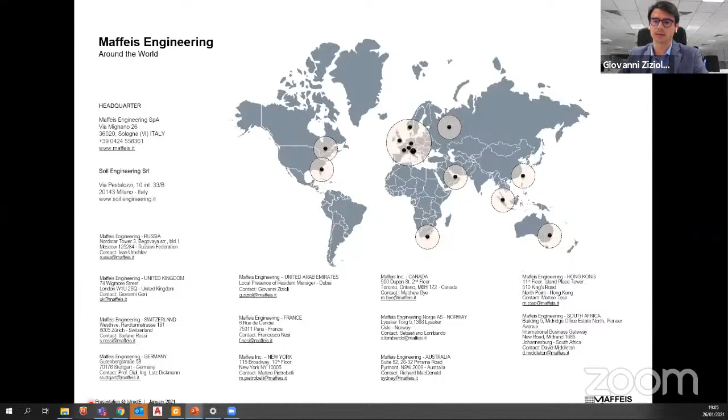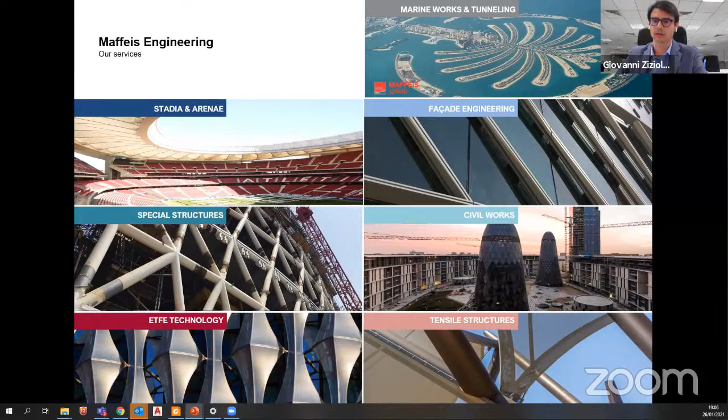Some photos of our office, just to give an idea of what we do. We don't do only specialty structures; we also work in other types of engineering services related mostly to structural and facade work. Of course, today's topic is closely linked to what we call specialty structures, especially with steel elements.

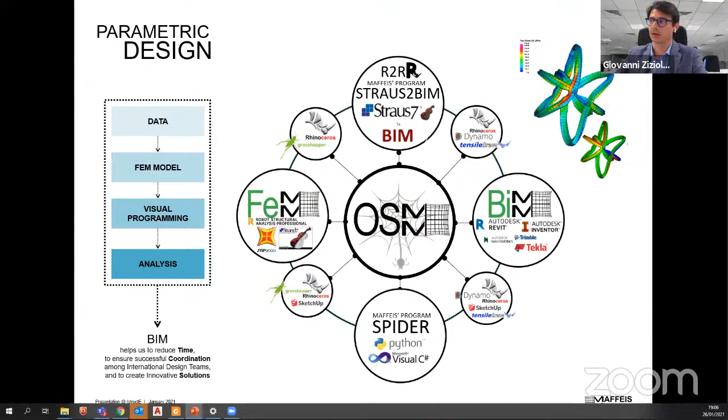I've prepared something in my presentation related to what we refer to as the one single model, our integrated approach for parametric design. I'll show you later a brief video of how this one single model approach has been applied on this specific project.

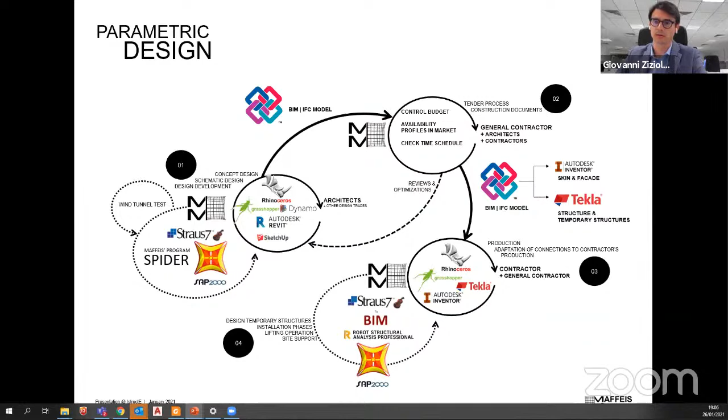I'd like to give you some ideas about the project itself, and especially thank all the players involved. Our client had the most complicated part of the job: the fabrication and erection of the horizontal tower, as it was defined, of the link bridge itself. That was Eversendai Engineering. The main contractor, Alec, is executing a fantastic job. The consultant was WSP, together with Nikken Sekkei as the main consultant and architect.

And the final client was represented by Ithra Dubai and ICD, with Mace as project manager. I would also like to thank our team in Italy, led by Enrico Mazzarolo, especially Marco, Riccardo, Jacopo, and Claudio, who have worked extensively on this project for a long time.

The project for us was substantially completed last summer, after almost 2 years of design. Going to more technical aspects, the link bridge stands between the two main towers, which you can see in the photos and renders, at about 300 meters and 241 meters height. The bridge hangs at a height of more or less 125 meters from ground level and is 210 meters long.

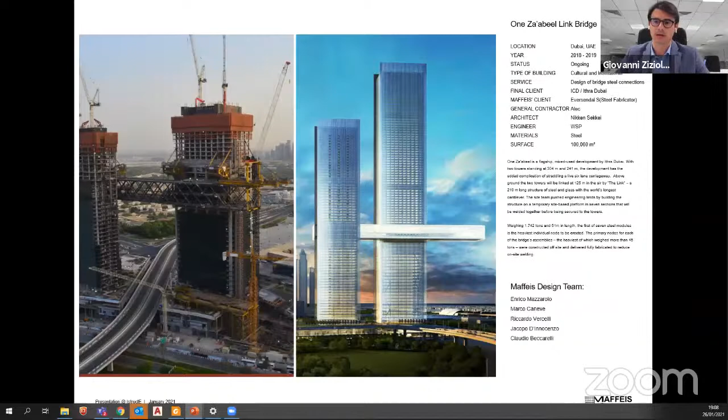For us, the joints were substantially identified in 3 typologies: typical interface nodes, and the 2 joints in Tower A and Tower B, connected to the civil works in the main tower. We had about 1,000 secondary node connections analyzed analytically, about 520 main and primary joints, and the total number of typical joints analyzed with the FEA approach, which I'll show later, was about 190.

I included some ideas about the assumptions and design criteria followed during the design of these joints. First, the joints were identified in an optic of parametric design, with zones, families, subfamilies, and then a unique number. The zone identified the location of the joint - for example, upper chord, bottom chord, elevations on Tower A or Tower B, internal interface joint, and so on. Families identified joints with the same geometry within the same family, and subfamilies identified joints with the same profiles or dimensions. The unique number identified every joint with one single number not repeated anywhere else.

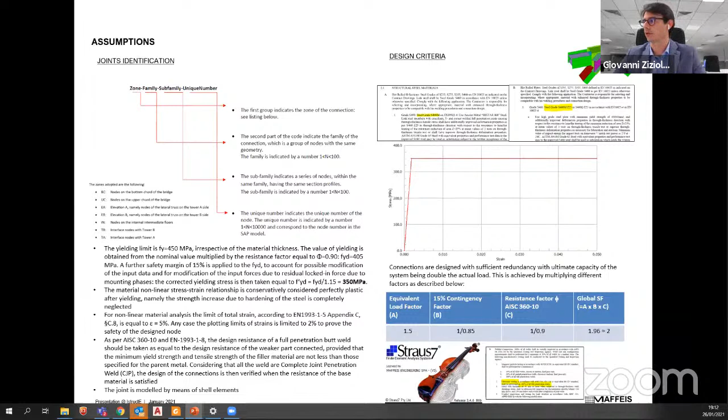For the numerical simulation, to transfer the straining actions for every element converging in a joint, we used what we call transfer beams, moving the 6 components of the straining actions in every member up to the edge of the local model, where rigid links connected the straining actions to the plate.

However, since these transfer beams were not connected at the center of the joint, there was a very small gap in between. The only way to guarantee equilibrium would be that the sum of the total reaction of every component of the 6 components of reactions equals 0.

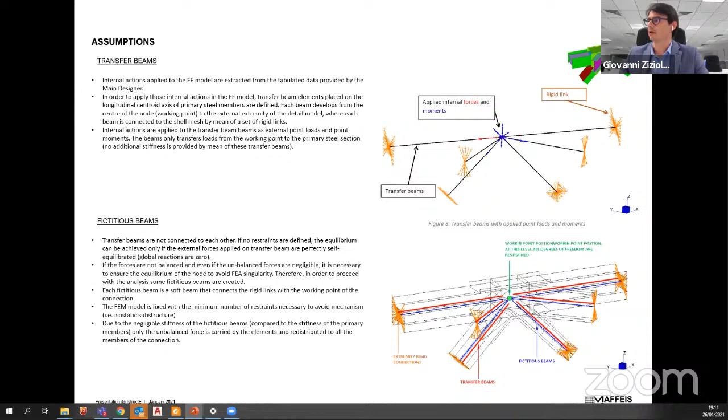Since this was not the case - because the global model was giving unbalanced reactions in the joint for various reasons related to the modeling of the global bridge and tower plus bridges model - we decided to implement a technique used in various projects: including a fictitious beam, which has the same center line as the transfer beam but has very low, substantially null stiffness. This way, the fictitious beam is able to balance the unbalanced reaction and distribute it between the elements based on the relative stiffness of the various converging elements. This procedure proved to work, and I will show you later some results, avoiding numerical errors during the FEA analysis.

Some specific aspects analyzed during this project, not really ordinary in common structural engineering practice, were the consideration for plate eccentricity.

We modeled the plates to take into account the additional moment generated by the eccentricity due to the plates not being aligned in terms of center line, which the software wouldn't do automatically. We also considered the effect of cope holes on the localized stresses in the single plate, using 40mm cope holes on the safe side. The effects of these cope holes proved substantially null, so this verification did not change the design results of the joint.

I'd like to show you one typical interface joint and one typical steel-to-steel intermediate joint. We'll start with the second one. This is a joint on the upper chord, family 1, subfamily 11, with single node number 4680. You can see the geometry of the elements of this specific joint.

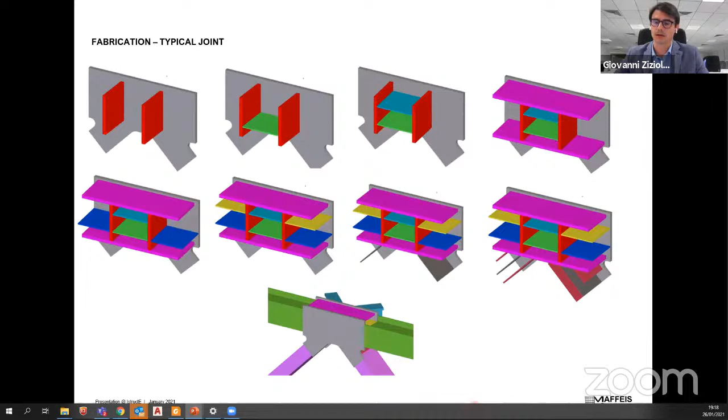This gives an idea of one typical joint and how it could actually be fabricated step by step, up to the final product.

Moving to the interface joints, these are obviously the most critical connections in the whole project, representing the primary interface between the link bridge and the concrete towers. They need to withstand the in-plane bracing forces transferred from the bridge to the concrete towers. On the bridge side, these reactions are 100% taken by the steel sections.

On the tower side, the forces need to be progressively transferred to the RC works, to the concrete slab and the concrete wall. In order to solve this type of joint, we decided to follow an FEA analysis as well, which I will show you later in terms of results.

In a nutshell, we adopted two types of resisting mechanism, and despite the standard allowing us to choose just one of the two, we decided to verify them both—an assumption that goes on the safe side due to the necessity of having a very robust design.

The first mechanism relies on the bending strength of the column, so the bending moment is taken by the embedded column, the vertical element. The second mechanism instead relies on the bending and bearing strength of the horizontal steel beam, again on the bridge side.

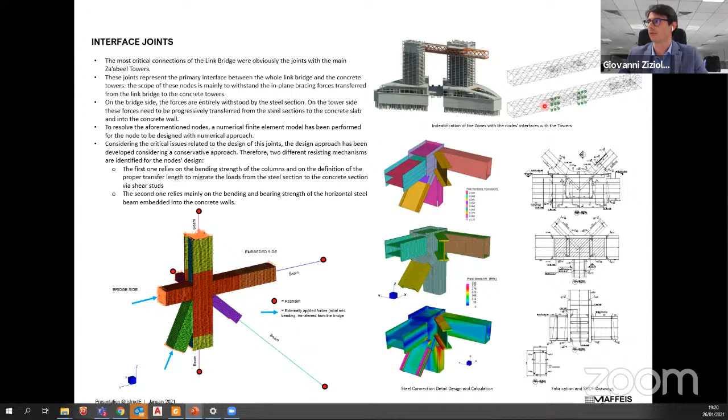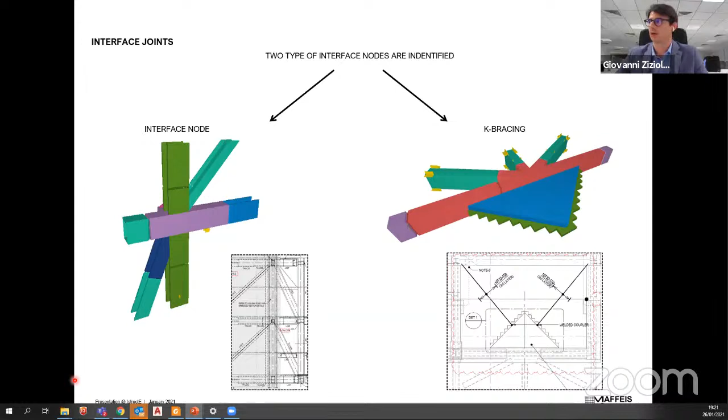The two types of interface nodes identified were the purely interface nodes I showed you earlier, identified by embedded columns, beams, and diagonals, and what were called K-bracing, with an embedded steel plate to redistribute the forces inside the concrete slab due to the in-plane bracing from the bridge.

So graphically speaking, transfer mechanism 1 that I explained earlier is substantially the governing mechanism for the columns.

So at the contraflexure point, the full bending moment is given to the column itself, while the vertical and horizontal forces are distributed between the beam and the columns. And the contraflexure point was identified at mid-height of the column itself.

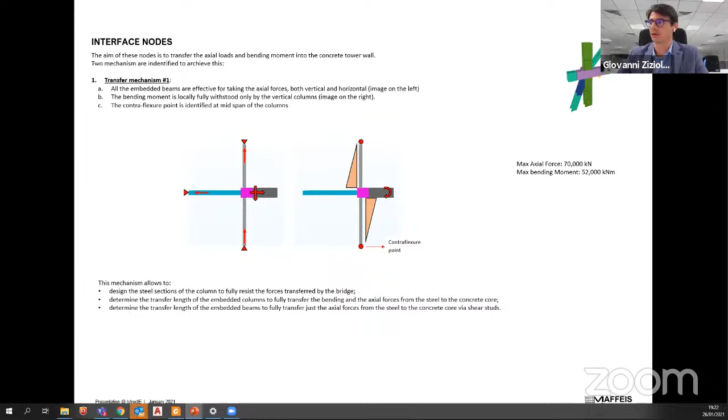Just to give you an idea of the amount of reactions that had to be transferred through these elements, we had about 70,000 kilonewton axial forces and more than 50,000 kilonewton meter bending moment. So very, very high reactions to be transferred inside the tower.

Mechanism 2, instead, as I mentioned earlier, relies on the distribution of the bending moment inside the embedded beams via a contribution of the bearing resistance on the concrete side. So in this case, this mechanism is usually governing the design of the embedded beam.

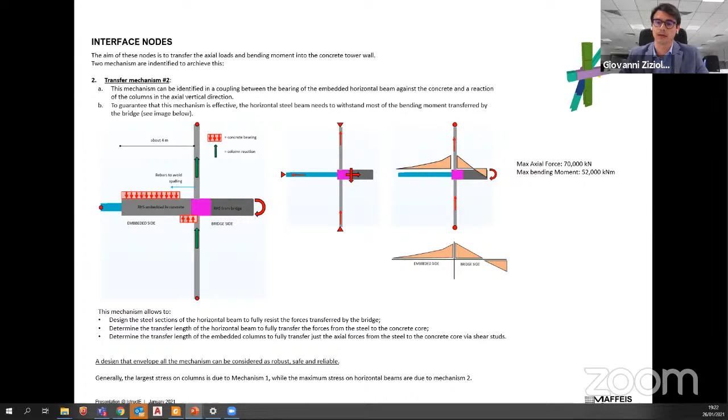In terms of the K-bracing, instead, we took a similar approach in terms of resisting mechanism. So mechanism 1 and mechanism 2 again were enveloped in order to define a very robust design that will be able to withstand both conditions.

So the two mechanisms substantially distribute these two components in a different way. In mechanism 1, both the Fx shear force and the bending moment Mx are split with certain percentages between the concrete slab and the concrete wall.

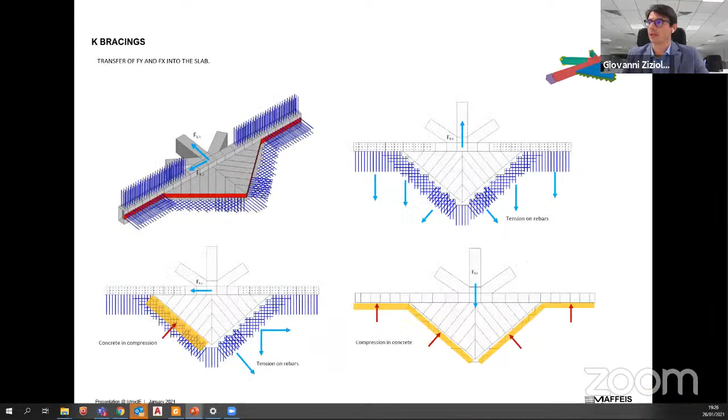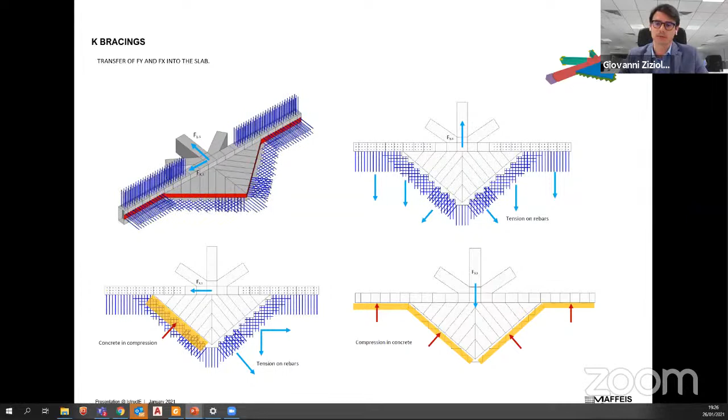So this is basically how the transfer mechanisms were then verified. Of course we took into account the existing bars, and the Fx and Fy components are taken substantially by a strut and tie mechanism, with compression on the concrete side and tension on the rebar side.

Similarly, we did this for the two moments Mx and My that are transferred inside the slab, again with compression on the concrete side and tension in the rebars. And we did the similar distribution for the wall.

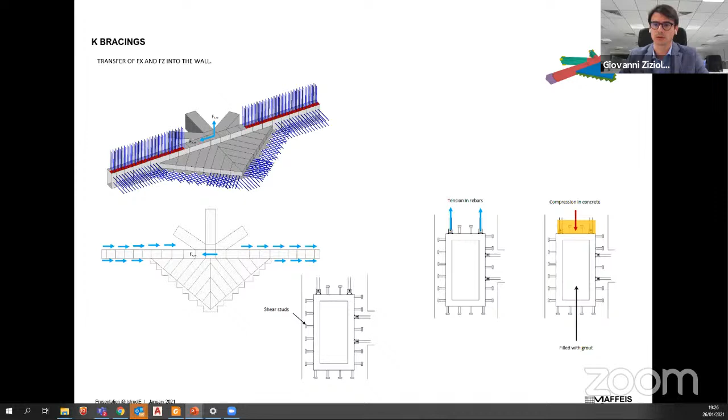The extensive shear studs that were present were then defined, and the rebars were designed based on the straining actions distribution and the percentage of the resisting mechanism that I showed you earlier, so Fx and Fz for the wall.

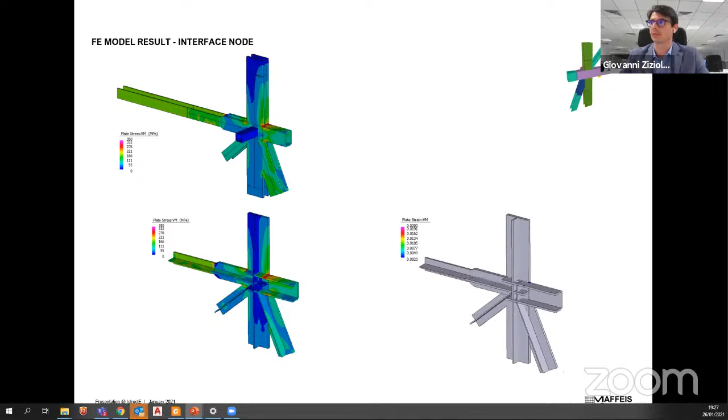So the results in terms of this were more, let's say, an analytical approach. The joint was, of course, also designed using FEA analysis to verify the stresses in the plates and in the converging elements. These are the results of one typical interface joint in terms of stresses and strain.

Similarly, we did this for the K-bracing. These are the results of the stresses in all the converging elements, in the wedge plates, and in the stiffening plate inside the box beam.

I have a quick video that I would like to show you in terms of how the parametric approach was used for this specific project, showing how the process of designing and verifying these joints, which come in very large numbers, was made as automatic as possible.

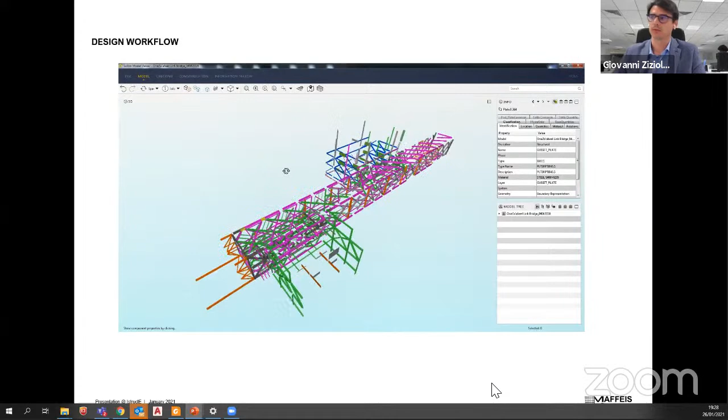We started with the definition of the IFC geometry that was imported into an IFC file, where all the elements, all the plates of the joints and the converging elements in the joint itself are identified in terms of their dimensions and materials, and in this case it's all S460.

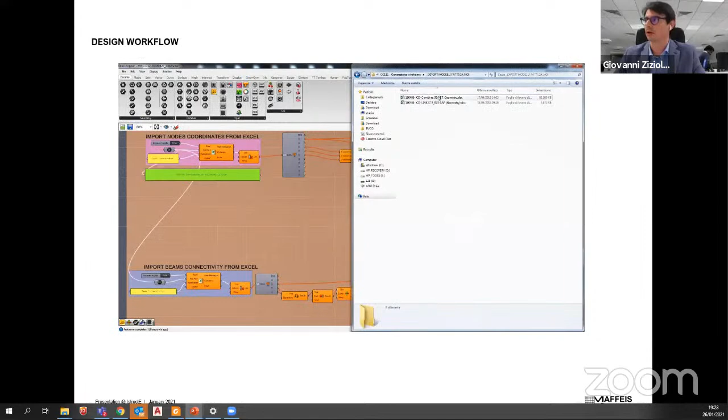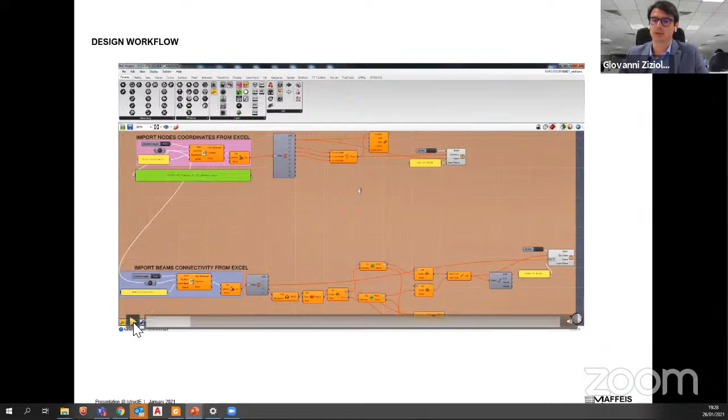Then we imported the global model. We had two models, basically from WSP for the main bridge: an ETABS model and a SAP model. These models were then imported in terms of all their information, so geometry and straining actions, inside the Grasshopper platform.

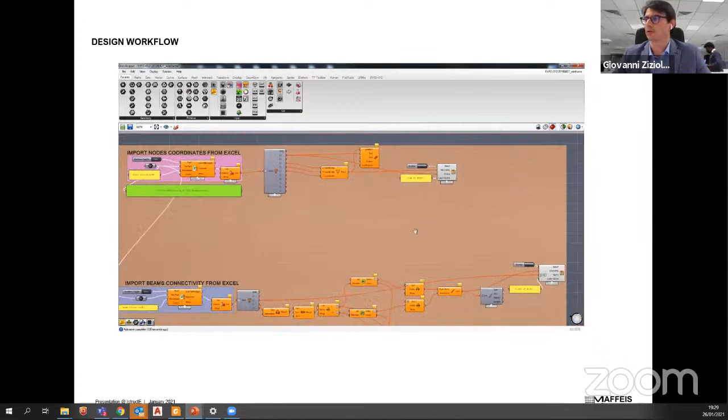Basically the nodes were imported in terms of coordinates from the Excel file, and then we imported the connectivity of all the beams.

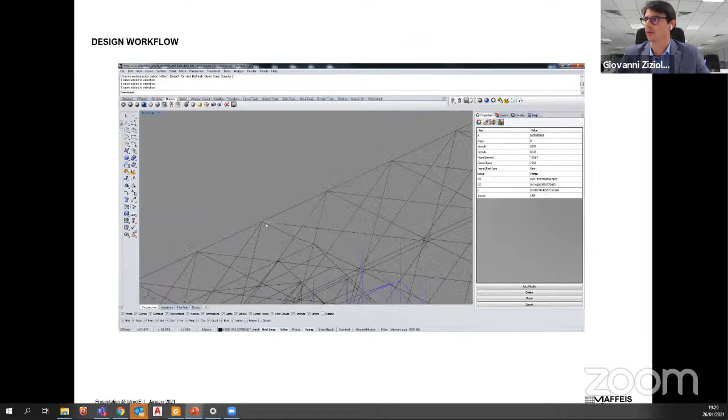Once we reached that, we could switch on in Rhino to visualize all the elements. All the elements here are already defined in terms of all their properties, and of course with the unique number that corresponds to the SAP and the ETABS model.

And then we did the same for the joints, which will come shortly.

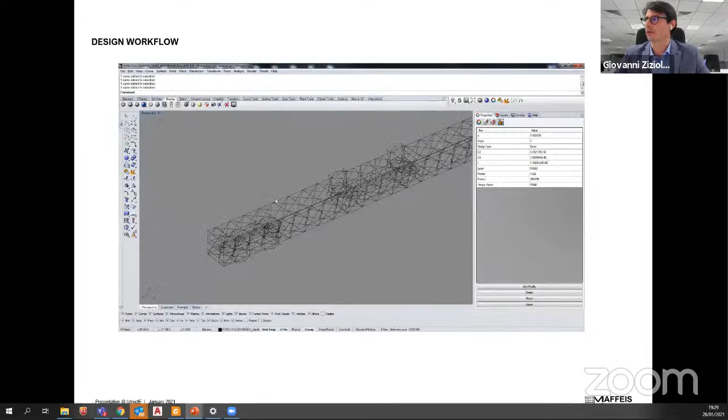So for the joint geometry, we did the same to import it inside the wireframe. If we switch on the related layer in Rhino, we're able to visualize graphically each one of these joints. All the plates are correctly modeled already, and they are imported directly from Grasshopper.

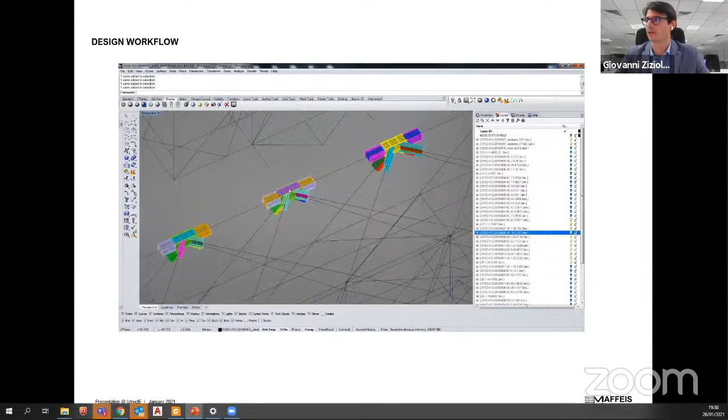If we select a single plate, all the properties of these plates are already assigned - substantially, in this case, the thickness, so the dimension of the plate and the thickness itself.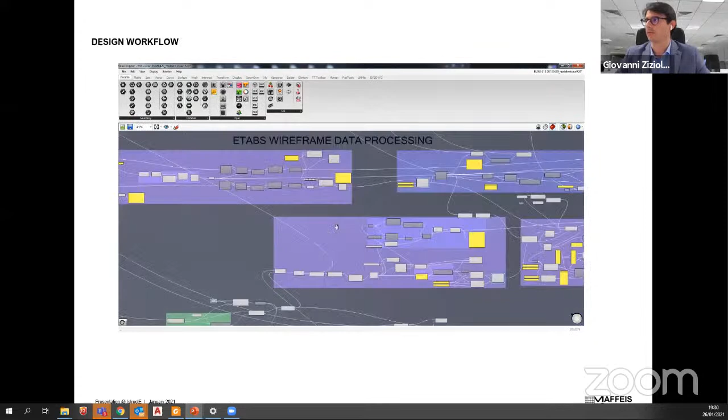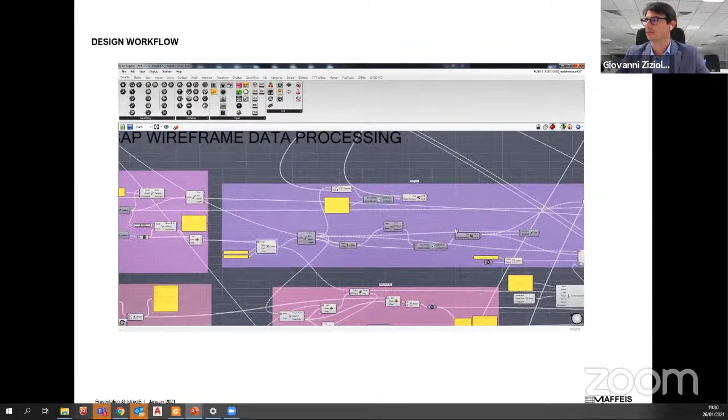The next step is the generation of the FEM node by means of Grasshopper. So we input the wireframe, we input the ETABS, we process the ETABS wireframe, and we do the same with all the beam properties. We do the same for the SAP global model, as well as the beam properties from SAP.

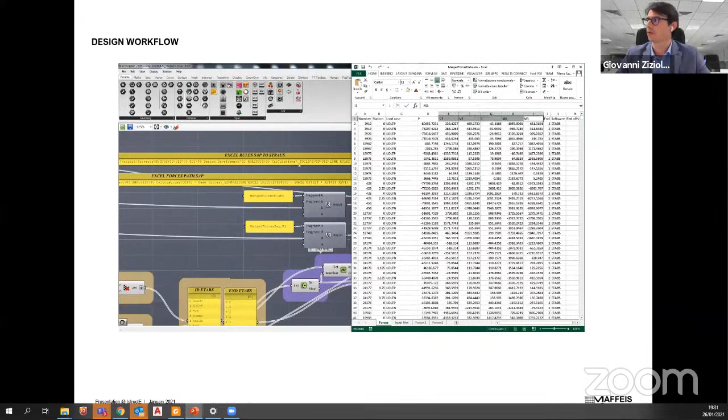And then finally, we're able to import and process all the forces, all the straining actions for every element. This is the input that we had: the six components of the straining actions for every converging element in every joint, for every combination.

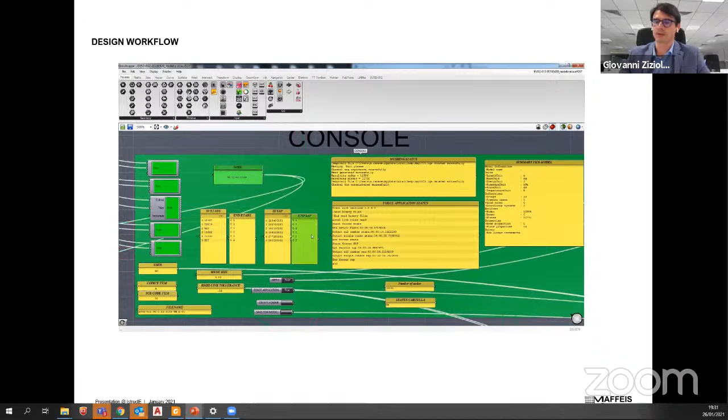Then we select which type of joint we want to analyze, with the single joint number, family, subfamily that I described earlier. And then from the console, we're able to create and mesh the surface, which you can see here on the left side.

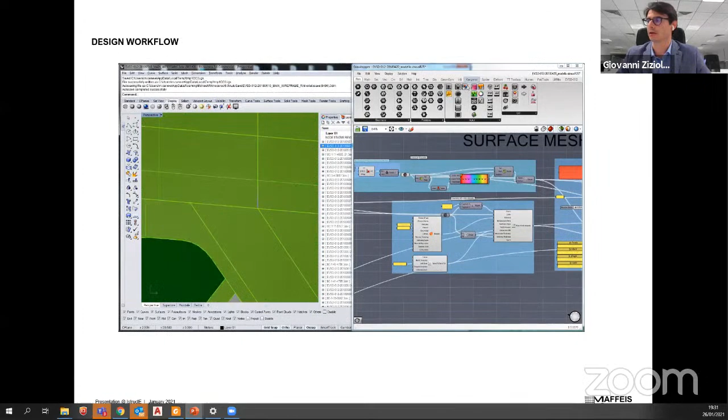The surface is automatically meshed already in Grasshopper Rhino, and it's ready to be exported. We can then save the FEA model, which creates a TXT file inside an automatically generated folder with the unique number of the specific joint selected. This is all created automatically.

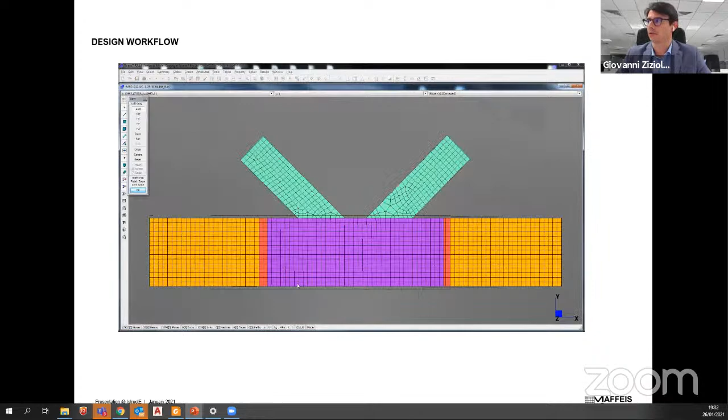Then we can import the TXT into our solver, which is Strand7, and we can cross-check that all the elements, all the plates, are imported correctly in terms of their geometry and thickness. The geometry is substantially correct, and we can check the plates also in terms of their thickness, to confirm it matches with the IFC.

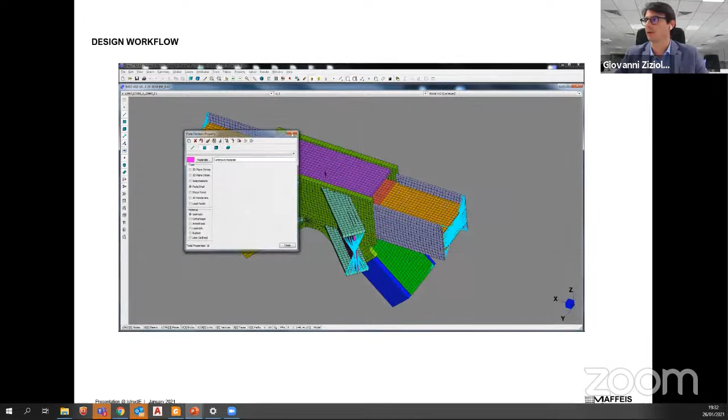And then we have a cross-check on the transfer and the fictitious beams that I explained earlier, which allow us to transfer the straining actions for the transfer beam and avoid numerical errors for unbalanced reactions. Finally, we check all the straining actions for every combination, for both the ETABS and SAP models, that are automatically imported inside Strand7 via Grasshopper.

So the model is ready to be run, and the nonlinear analysis is started, and then the results of this nonlinear analysis are what I've shown you before in terms of stresses and strain distribution.

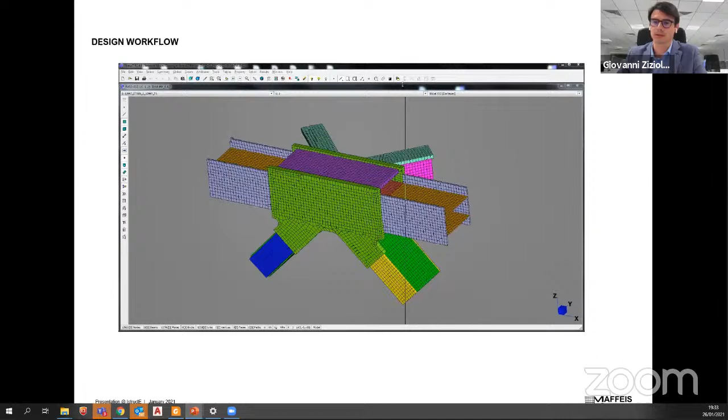Another interesting topic in terms of automatization for us was the necessity of updating this simulation with what was called the validation approach. Just before the lifting of the bridge, there was a necessity to recheck joints due to some modifications in the global design. So the way this procedure was done, again in the same platform in Grasshopper, we added a tool also to

automatize the process of the reporting generation. So basically, in this way, we were able to update all the reports that were generated previously, of course in a manual way, automatically. This would have taken much longer if done in a standard way,

and allowed us to avoid any type of delays on the site activities. So what we did, substantially in Grasshopper, we created a folder path where all the FEM nodes needed to be analyzed. We created a log file path, and defined where to save the analyzed FEM nodes, and we decided how many nodes to run simultaneously.

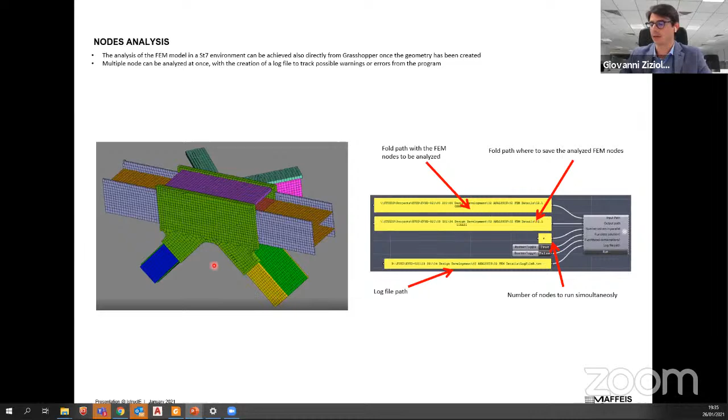Then in the next step, once the joints were analyzed, we were able to list the nodes that we wanted to report simultaneously. For example, in this case, there's a list of 13 joints, and we had the path defined for the saving and updating of the report.

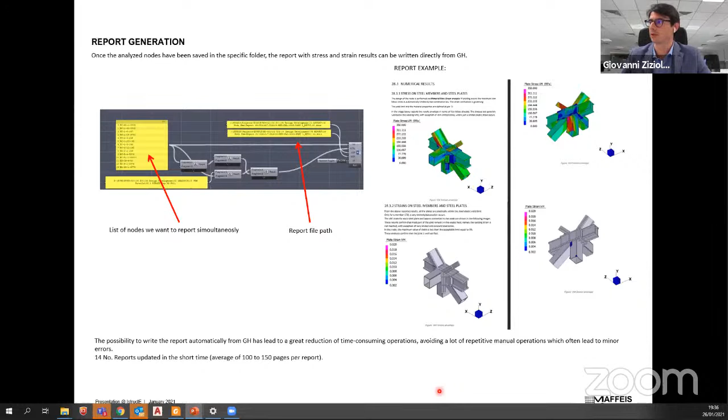So the outcome of this activity was the update of the report that you see here on the right, where all the pictures that needed to be replaced with the new results of the new simulation were automatically updated. We had a total, just for the main FEA joints between interface and typical joints, of 14 reports, and each one of these reports had an average of 100 to 150 pages. So we were able to update all these reports in the quickest and most automatic way.

And then the results of the stresses and strain that you see in the top and bottom parts were automatically updated.

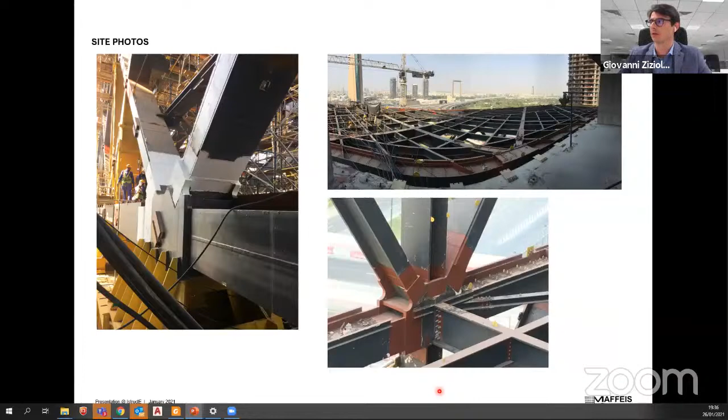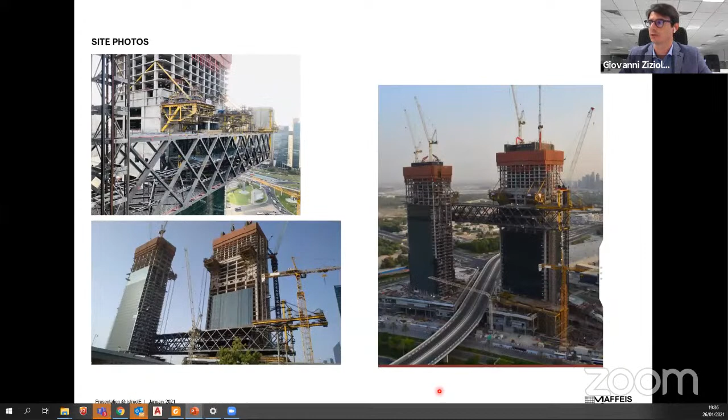These are some photos from the site just to show you the dimension of some of these main joints, and some of the stages of installation. These are some of the embedded elements with the shear studs, and then the bridge, as you probably have seen, was lifted substantially in one piece, with the exception of the last 900 tons of the most cantilevered part, which was lifted into position in one stage.

I've completed from my side, Sama. Oh, that's good. So the connections are big. The topic is good, you know. Yeah, nice. They are very big. Yes.

We have some questions, we'll take up some now. The first question is from Mr. Khaldun Almafsha: Have you considered earthquake movement in connection design, if based on static or RSA approach? Pardon, could you repeat the question? Did you consider earthquake movement in connection design? Sorry Sam, I didn't hear which moment. Earthquake moment, yes, of course.

All the load combinations that I showed you, these massive Excel files coming from the main design, the main design were an SAP and an ETABS model developed by WSP, and WSP of course considered all the load cases, including earthquake. So the straining actions that were imported used all the combinations, including earthquake, wind, and all the cases.

There's a question from Mr. Sabi Kisaf: How did you design for differential settlement between the two towers? This is something that... Sorry, could you repeat the question a little bigger again. Also, the temperature - because as you know the length of the bridge you mentioned is bigger - how did you consider temperature in the design of the connection?

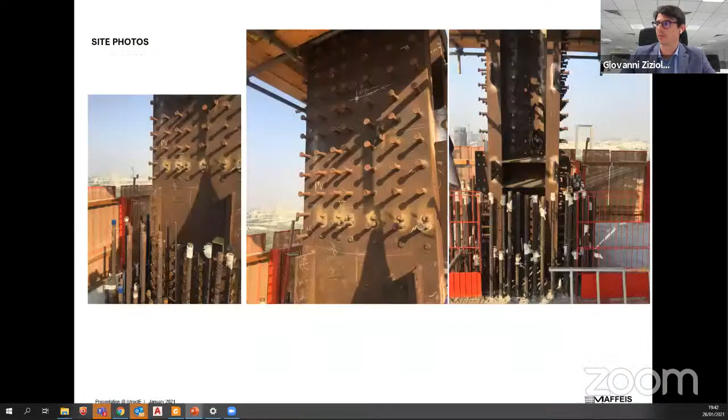Well, it's indeed very dense, as you've seen in some of the pictures. However, there was a necessity for having this type of embeds, so of course one solution was using high diameter rebars. The rebars are grade 400, a standard B400 grade, but substantially there were no specific requirements other than that on the concrete side. These are extremely dense elements, so we tried to use the existing bars as much as possible, but as you could see from the models and pictures, we had high density reinforcement embedded, especially in the slab and column, because of the very high shear force and bending moment that had to be transferred to the bridge itself.

A question from Mr. Richard Tharun: how are the deflections of the link structure considered in the design? The deflection of the link structure has been considered in the design.

It's the same question again, I believe, everybody is talking about overall deflection and differential settlement. The only thing I could show on that topic is that we considered, as I mentioned before, the effect of geometrical imperfection from the bridge side - plus minus 50 millimeters. Because during installation the final geometry could not be guaranteed 100% from the bridge side, this would transfer additional bending moment from the bridge to the tower. But this is not really related to settlement; it's related to the installation tolerances of the bridge itself.

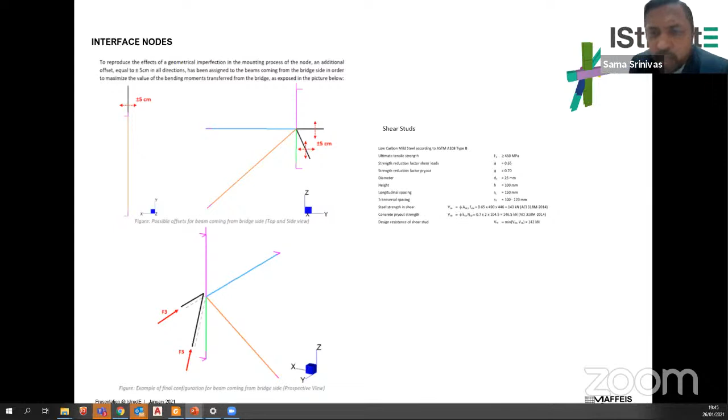It's via shear studs, so the embedded part works naturally, and I could show how it was modeled, substantially via springs. We considered a certain spring value from the concrete C70/85, and this was guaranteed in terms of transmission of forces within the section. For example, for an embedded element, the transfer of axial forces was via shear studs surrounding the section of the element.

In this case, it's either a box section or a built-up open section, an I-section. In the same way, we transferred the bending moment in either the weak or strong direction, where there is a composition of compression and tension, and the relevant shear stresses in the studs are designed to take these reactions.

There's a question from Mr. Payam Ismaili: How was the third-party design check and approval process taken place? Well, there was a third-party approval on the job by the municipality, and they reviewed every single calculation report and model. Even in discussion with the third party, we did a separate model with other software just to give the required level of confidence. So the design was third-party reviewed and stamped, and then approved by Dubai Municipality.

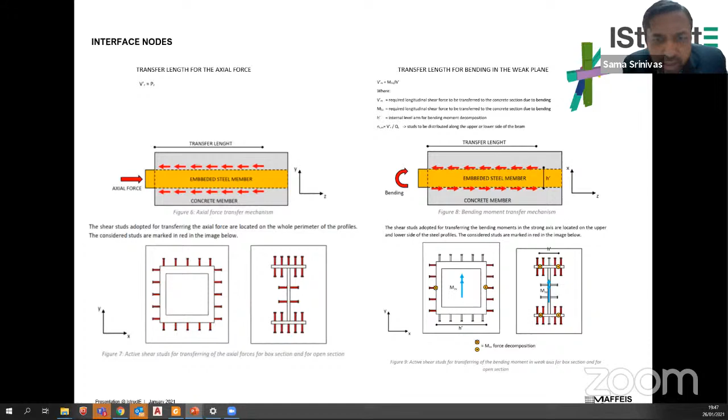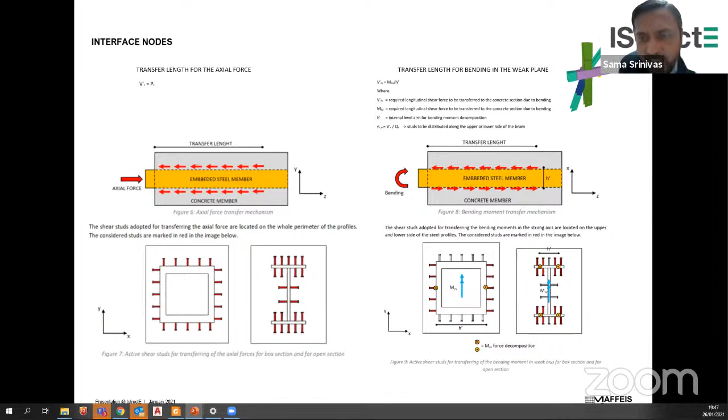Okay, question from Mr. Kalam, who is also a very good technologist in structural engineering. There are many questions from him. What were the first steps you did to define the connection geometry? Well, I started from the numerical results, but substantially these joints were conceptually defined by WSP. So as part of the tender package given to the fabricator, the joints were already identified in terms of their main geometry, and the purpose of the steel fabricator was partially the verification of these joints and partially the modifications whenever required.

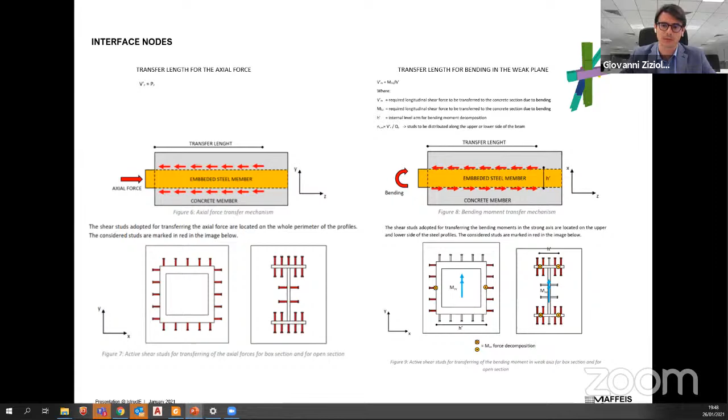For example, with additional plates, increasing the thickness of certain plates. The only elements that had to be completely designed from scratch, or sketched from scratch, were the interface joints, especially the K-bracing. For the K-bracing, with the mechanism I showed you with this wedge plate, it's something we had defined, considering the magnitude of the forces and the geometry of the slab and the wall.

So there was a significant change for this design compared to what was in the tender. But the main typical steel-to-steel joints were, in terms of their general geometry definition, already defined in the tender. And anyways, the plates of the joints are always as thick or thicker than the converging element, and we have complete joint penetration everywhere, as imposed by the specifications.

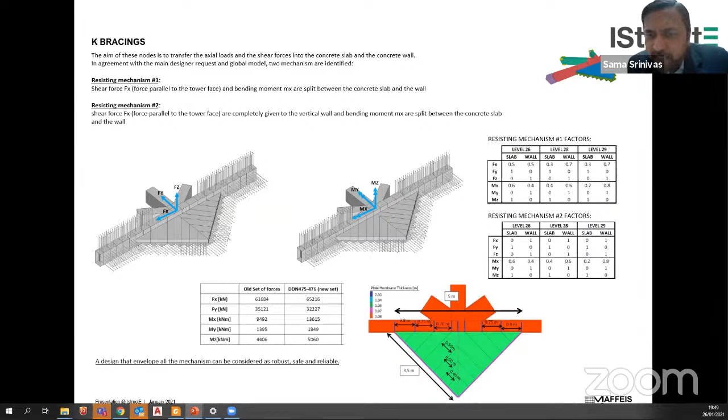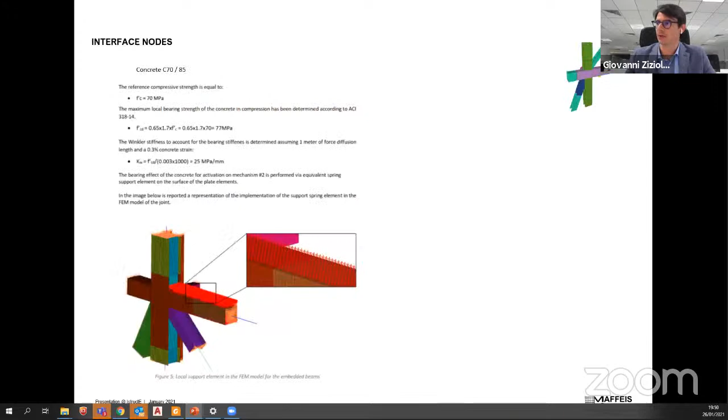Next question: what did you do if you needed to update the geometry based on the Strand7 analysis? If you got any evidence, what do you do? Well, this was done in Grasshopper automatically. So let's say, for example, if we take one of the typical joints, let's take one of them.

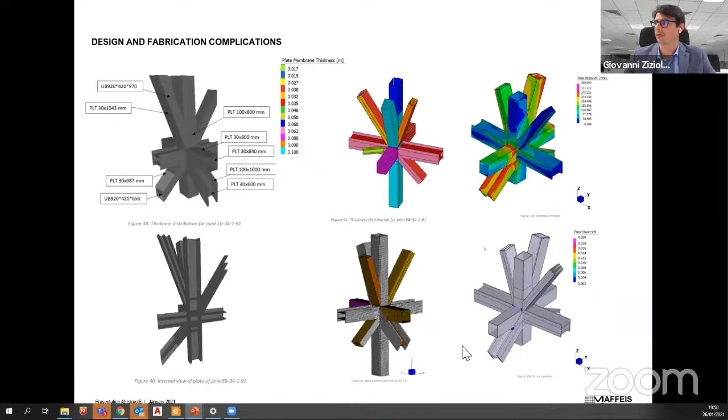For these joints, in case one of the converging plate elements would need to be modified, for example, we could take the original thickness to a higher thickness. The advantage of the automated process is that if all the stiffening plates inside these joints, which are 75mm thickness, need to be increased for certain reasons to 80mm, this could be easily done in the most automatic way inside Grasshopper itself, because the geometry of the node is defined there, and this will automatically update, through the baking process, the TXT file that is then imported into Strand7 for the analysis.

So the operation is not done directly via the solver, it's done fully under the Grasshopper platform.

Again, a question about integrity only. Everybody is asking about differential movement between the two towers, basically how you estimate future settlements. I know it's an integrated bridge — is that part of your scope, or is it part of the main design?

Okay, we'll take a couple of questions. What is the maximum forecast or estimated future settlement once the link bridge is in long term? I guess all these questions unfortunately relate to the settlement or the global design of the towers. I don't think it's something I could possibly answer.

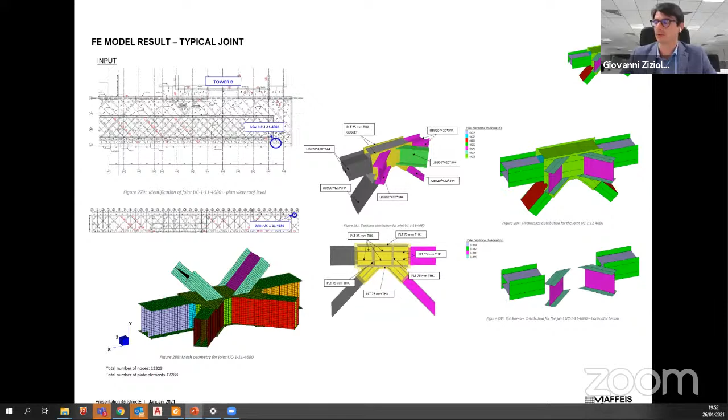Another challenge was, well, I showed you a few examples related to the eccentricity of the plates and the modeling of the couples. This is something we didn't initiate on our side — it was requested of us.

Other challenges were related to the fact that the automated process cannot be fully controlled by others, so it was challenging to show and explain how this was actually done. Fortunately, we had the chance to meet with the municipality and explain it to them.

Definitely the embedded joints were a good decision for the interface joint, designing for this double mechanism that I explained analytically, considering both mechanisms, because this was one of the things that was requested, for example, by the municipality later on.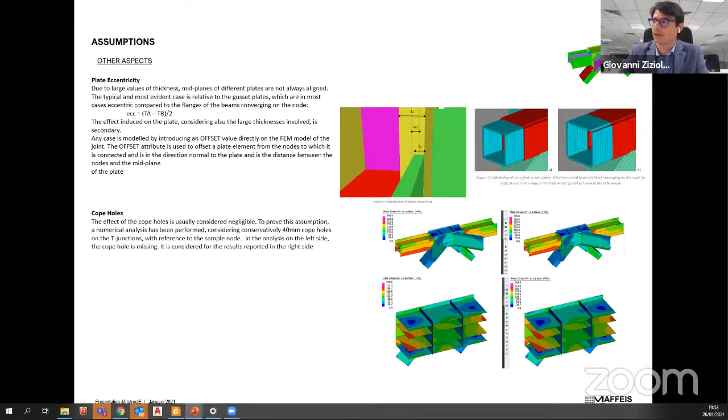Oh, okay. And what is the grade of steel? Any special grade of steel used for the connections, or is it the same?

As I mentioned earlier, the grade was imposed as standard, S460, used for all the hot rolled sections as well as for the plates. Of course, for the secondary commercial profiles, there was grade S355, a standard grade.

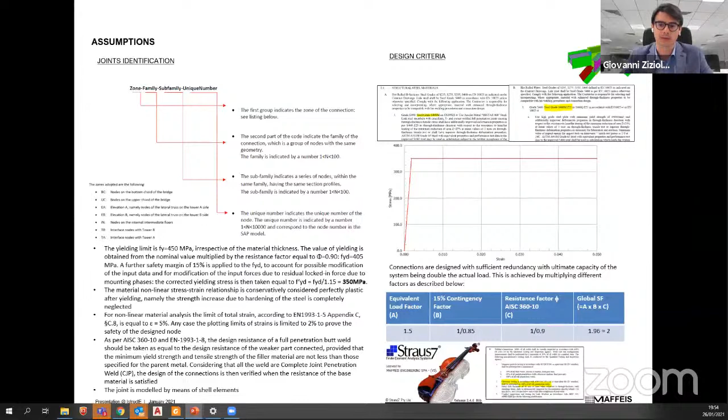The peculiarities of this S460 were two, I would say. One, the high yield strength, with constant yielding no matter the thickness of the plate. This would be very important because with such thick plates, we would otherwise have a significant reduction of the yielding itself.

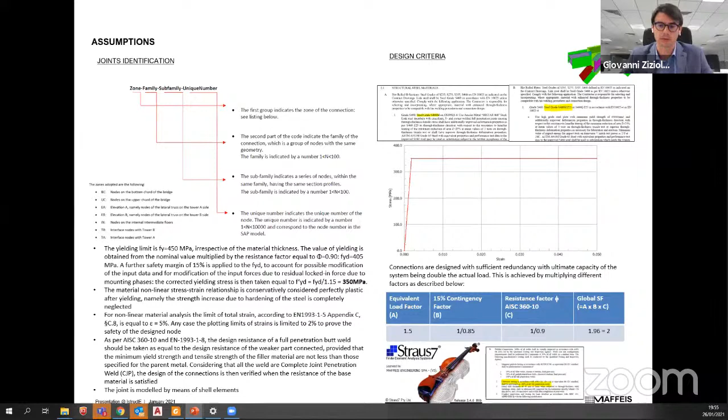The other characteristic was the Z quality. There were quite high requirements of Z quality. For most of these plates, especially the thick plates, we had to verify them for Z35 quality for the through thickness.

I could say another aspect related to this material was the challenge related to the toughness of the material itself. I think there was a note that I had included related to that, which I could show you.

So for the S460M, what we did - again, this followed discussions between the consultant, the third party, and the municipality - altogether we decided to check the performance of this high-grade steel considering a reference temperature of 15 degrees and a stress of 60% of the maximum yielding, the maximum von Mises stress that would come out of the FEA analysis.

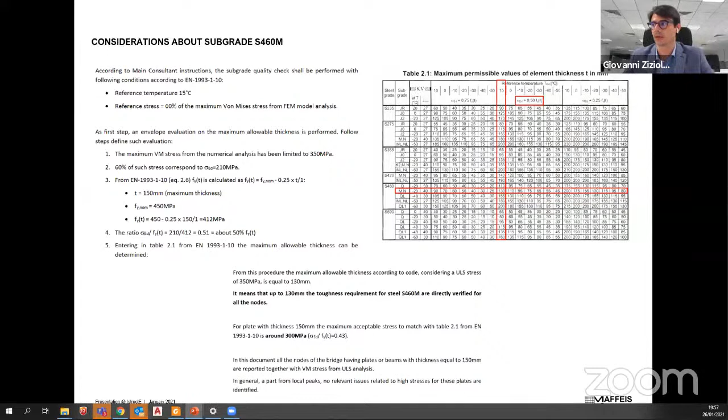This is one example of one of these joints. For example, this box section has plates of 150 mm thickness. So in order to verify the toughness requirement, we checked the stresses and identified that, except for very localized peak areas, most of the surface of the plate elements experience stress lower than 300 MPa. So again, the toughness requirement for the S460M grade is verified.

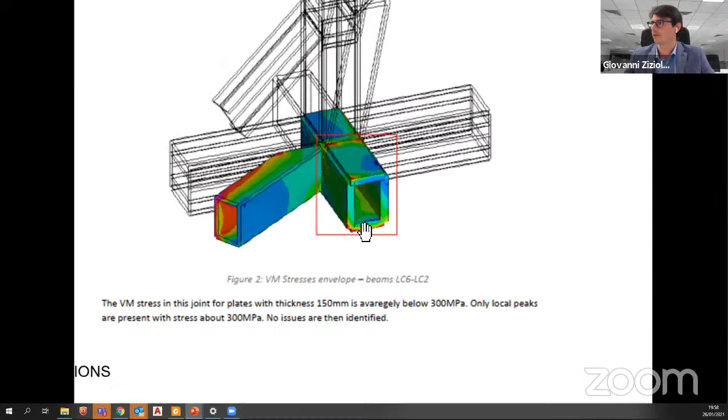From here, you can probably appreciate what I was mentioning earlier related to the necessity of verifying the variation of stresses over the plate thickness. You can see that on the external surface of the 150 mm plate thickness, we have much higher stress than on the internal surface. This is something that with other commercial software you may not be able to capture.

Oh, okay, good explanation, Giovanni. There's a question from Mr. Manoj - it's a good question, I think, I believe.

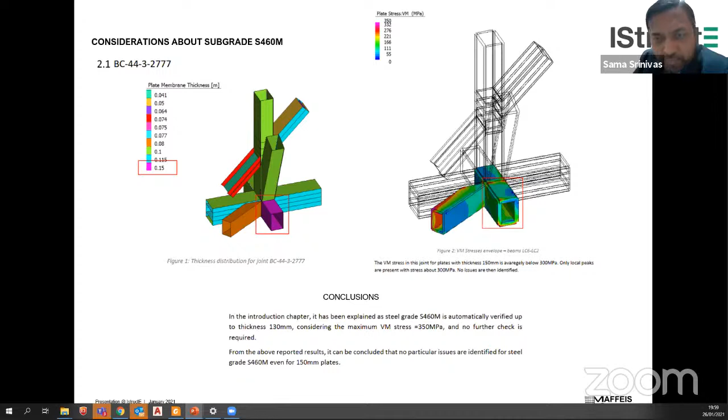How did you validate the algorithm followed in Rhino and Grasshopper with respect to manual calculations? How did you validate that your design is right from your analysis? Well, manually, let's say.

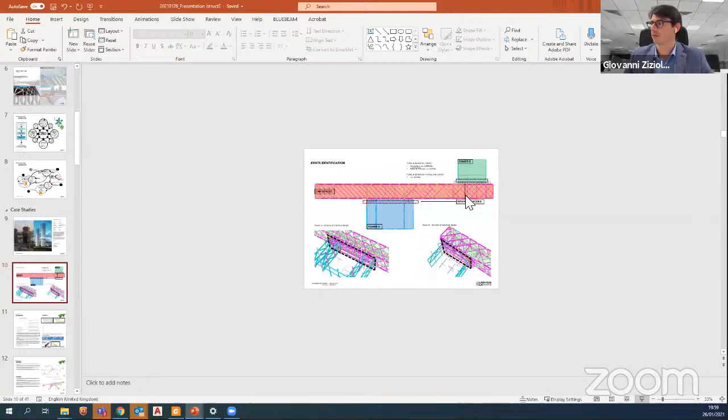Out of the 1,000 secondary joints that I mentioned in terms of numbers, these were designed with the analytical approach, basically with spreadsheet and analytical calculation. There was no FEA analysis.

The only joints that were analyzed with FEA, as typical joints, were 190. So we had 190 typologies.

For these joints, there was no possibility to do an analytical assessment, simply because the geometry of the joint, the thickness of the converging elements, the size and number of converging elements is not simple enough to use analytical approaches. Or better, it could be used, but it might lead to results that will not be that close, or may not capture some of the aspects that you could capture with the FEA.

So analytically wise, if you had to verify these joints, for sure they would be verified, especially considering that the thickness of the plates is always higher than the thickness of the converging member. But there would be the risk eventually to underestimate certain aspects that instead with the FEA analysis you would be better captured. So this was the decision.

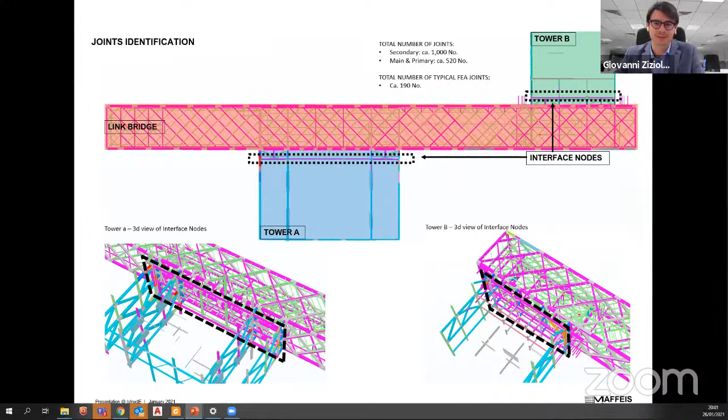One more thing, will you be able to share your email ID or contact details? I can see a lot of questions, but mainly towards general building behavior and how deflections etc. work. Unfortunately for that, I would have to transfer the questions to our colleagues of WSP who were designing the main bridge.

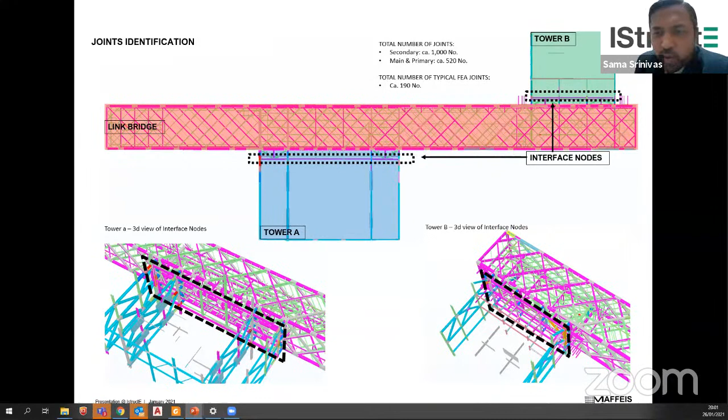Last question: did you consider fatigue design in the process, in the connection design? No, there was no specific requirement for fatigue design.

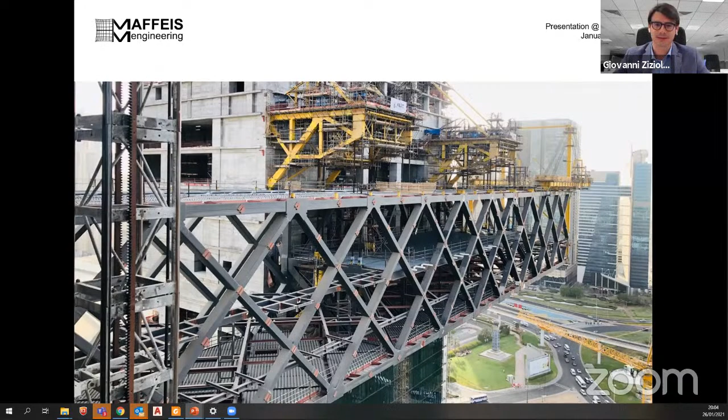So many questions are going to come on the overall, how the deflection etc. works. We'll try and see if any other global structural engineer, global analysis, who takes care of both structures together, we'll try to arrange a topic with. I'll give you the contact of Bob who was responsible for WSP, so maybe we can have a separate session for that. That'll be very interesting, Giovanni. Thank you.

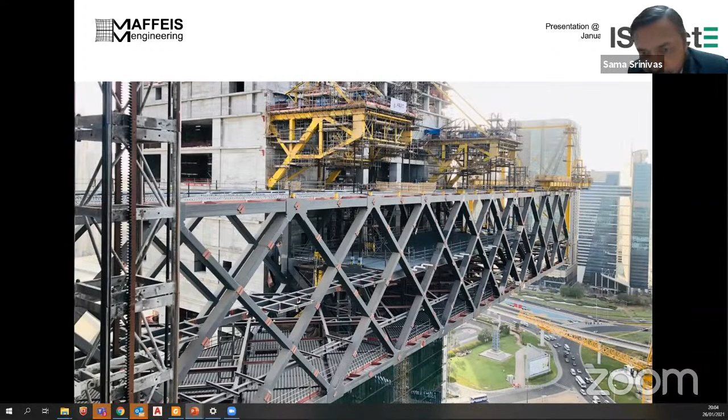Mr. Abdullah, is he there? Yes, I'm here. Abdullah is our honorary secretary, the man behind the technology with all our CPD talks. Thank you, Mr. Abdullah. Thank you, all the committee. Thank you, Giovanni. Bye, thank you, good night. Bye, bye, good night too.